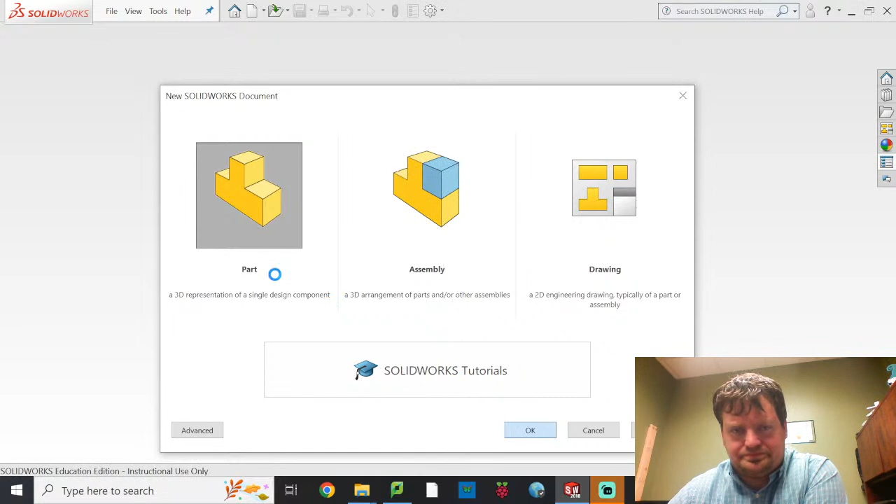I am putting together a video today to discuss how to animate a 4-bar linkage and how to plot a coupler curve. Now this is attempt number 2. I had a little bit of difficulty last time, so if you're watching this for the second time, go ahead and skip to the end when I actually do it right, because this will all be just stuff I've done before.

So we're going to start by making the 4-bar linkage. Here, there are 4 bars: a ground linkage, a rotating crank, a coupler, and a rocker. So that's the type of mechanism I'm going to be making.

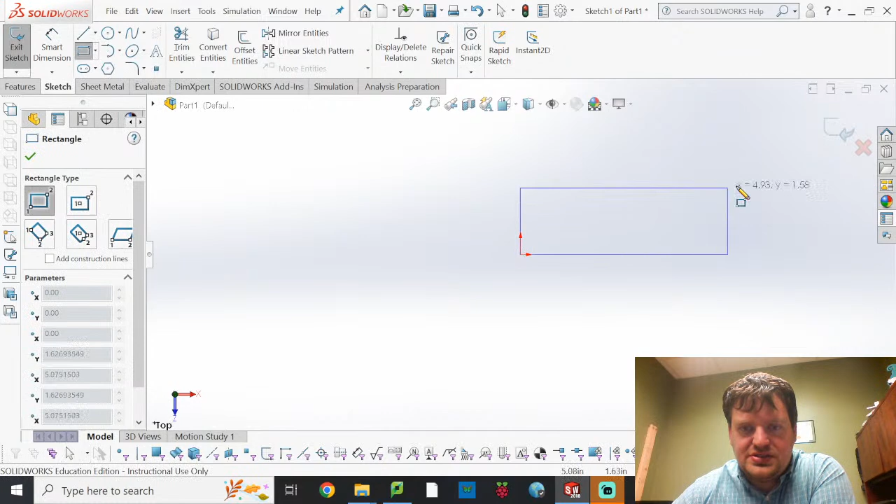Now, I've already done the math in my head, so I actually know what my link lengths need to be. I'm going to start by making my ground link. So here, I'll just make it nice and simple. Put a circle, circle. And then I'm going to create a center line here.

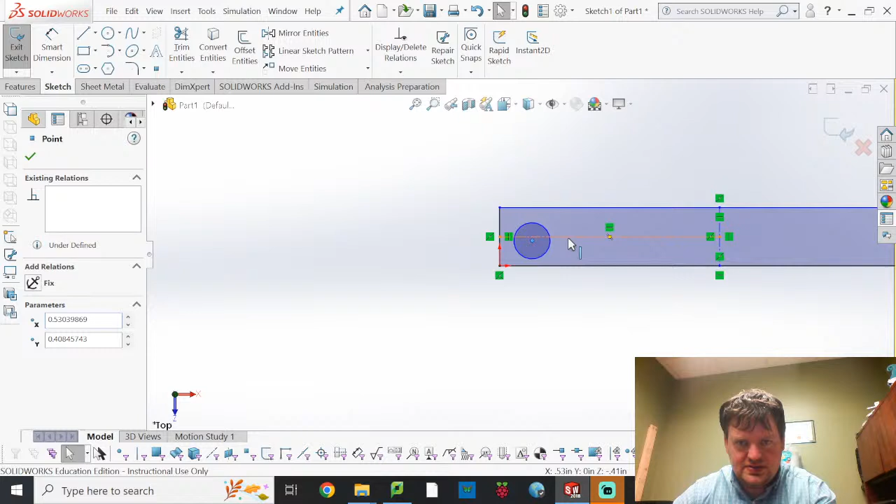And another center line here. I'm going to go ahead and select these two, control clicking on them, and I'm going to make them coincident, just so that it always falls in the midline there.

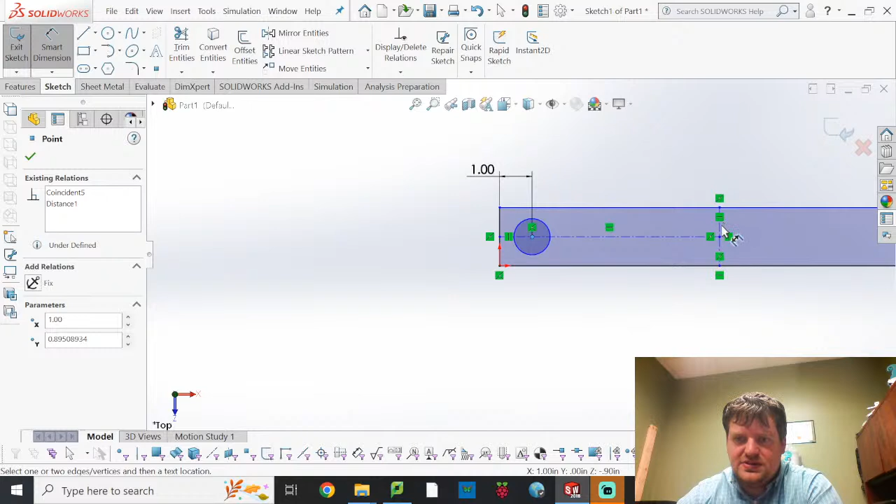And then what I'm going to do is I'm going to define 2 dimensions. Dimension from here to here, which I want that to be 1 inch, and then the distance from here to the center, which I want this to be 10 inches.

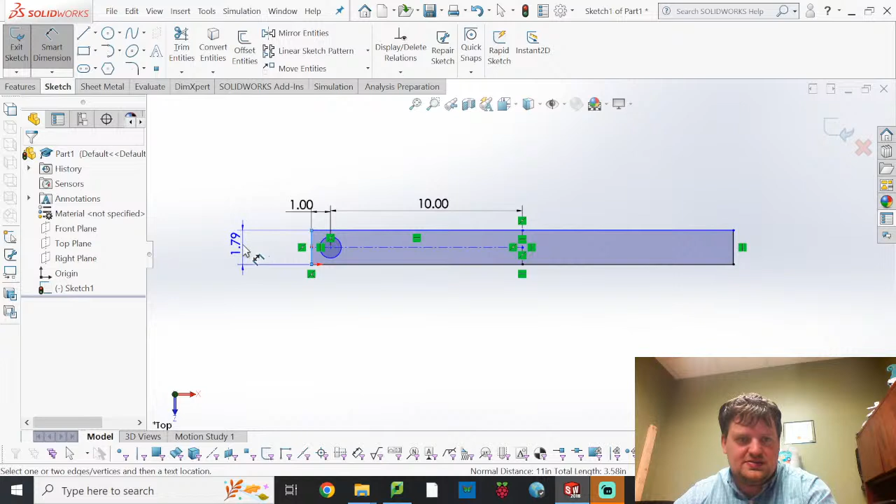We'll go ahead and say that I want—not that, I want this. We'll have this be about 2 inches wide. And I'm going to make my circle itself be half an inch, because why not?

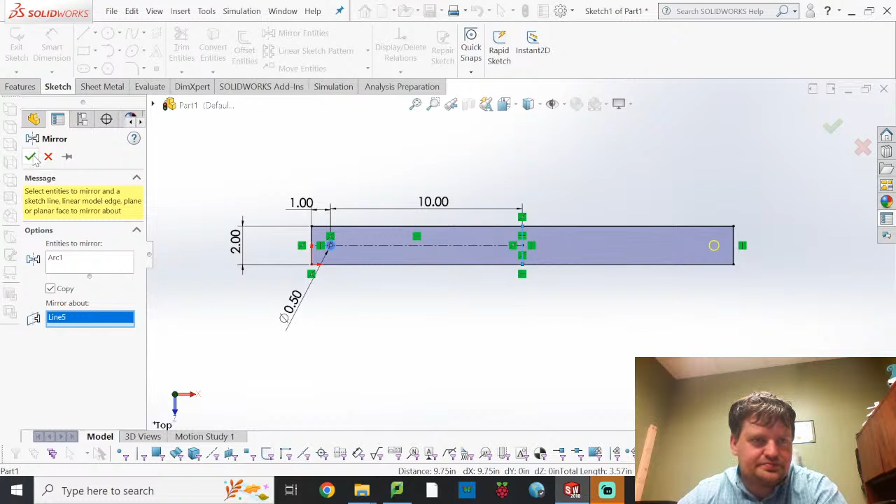Okay, one last piece. I'm going to mirror this over there so I have a nice uniform bar. So I'll take that mirrored about my center line here. And there we go, exit sketch. I'll extrude this up 1/4 of an inch, and this will be my ground linkage.

And done. 1/4 of an inch is a little thick, but you know, maybe we're making this out of plastic. So I will file, save as. And I've already got a folder set up. I'm just going to name this ground.

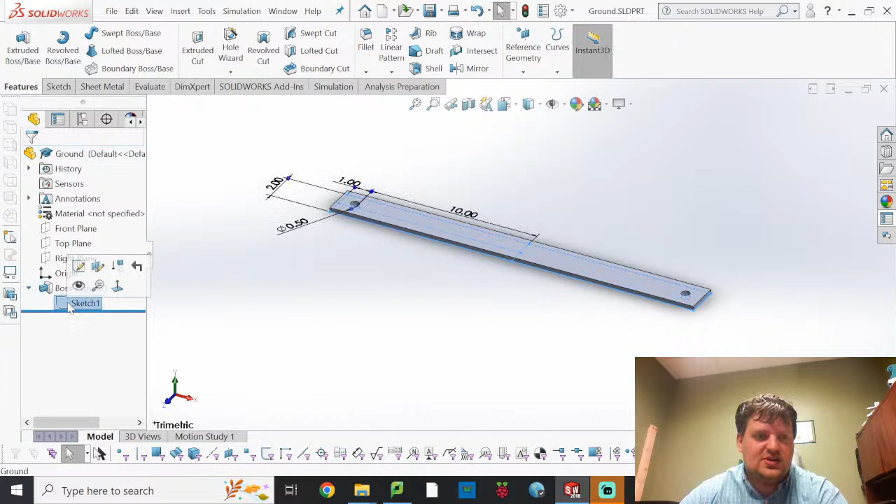Okay, now I'm going to do a couple of changes to my sketch, and that's all I'm going to do to make my different 4 bars. Here, I'm just changing this dimension. So here for a crank, I want a crank length to be about 6 inches. So I'm going to change this to be 3. Hit enter, exit sketch, it'll update.

I will file save as. If you just hit file save, it'll save over the ground one. Don't do that. Crank.

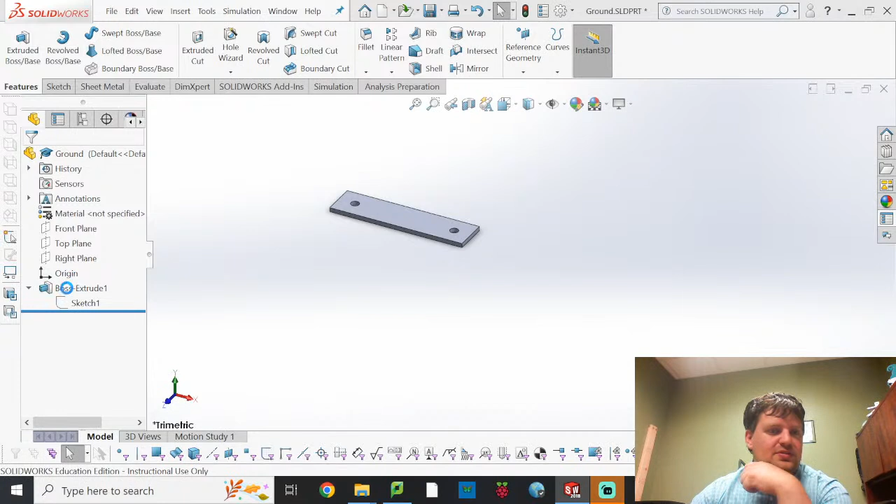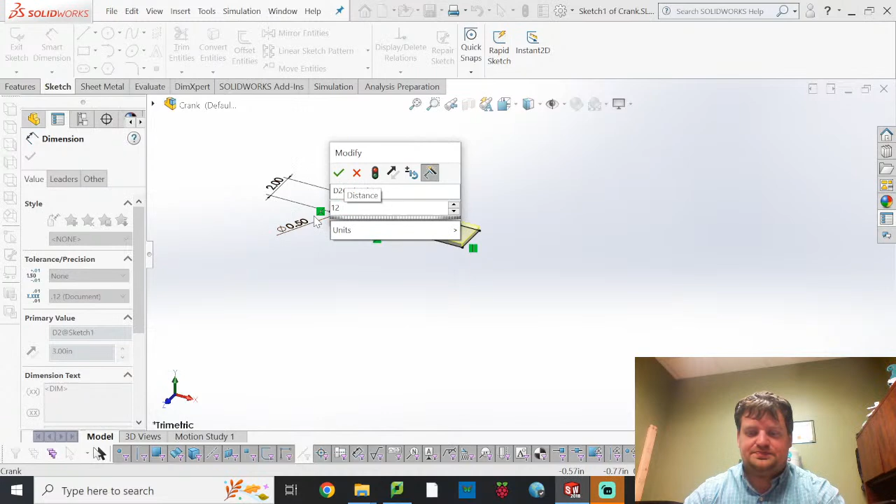Set my rocker. So here I've got 20 plus 3, and so that's—I need to have my P plus Q has to be larger than 20 plus 3. So I'm going to have that be, my rocker is going to be 12. Oh, I should have written 6. There it is. Exit sketch.

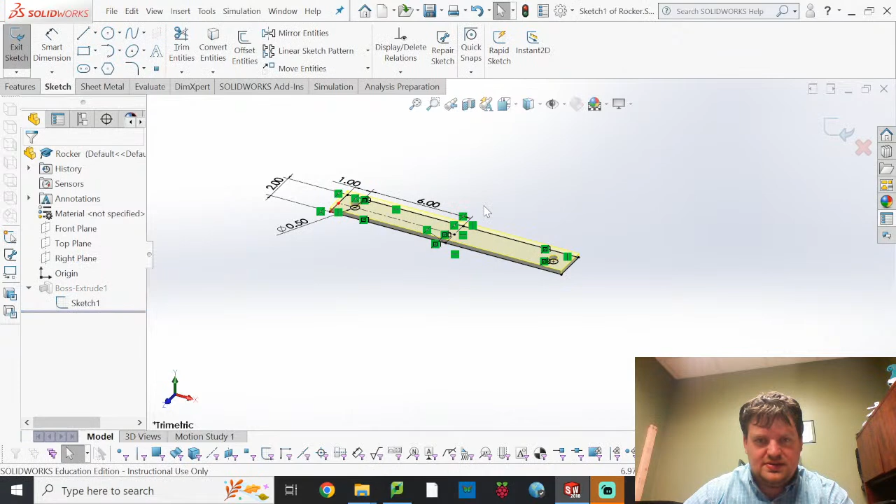File, save as. And this will be my rocker. And then one last change. This will be 16. And this will be my coupler.

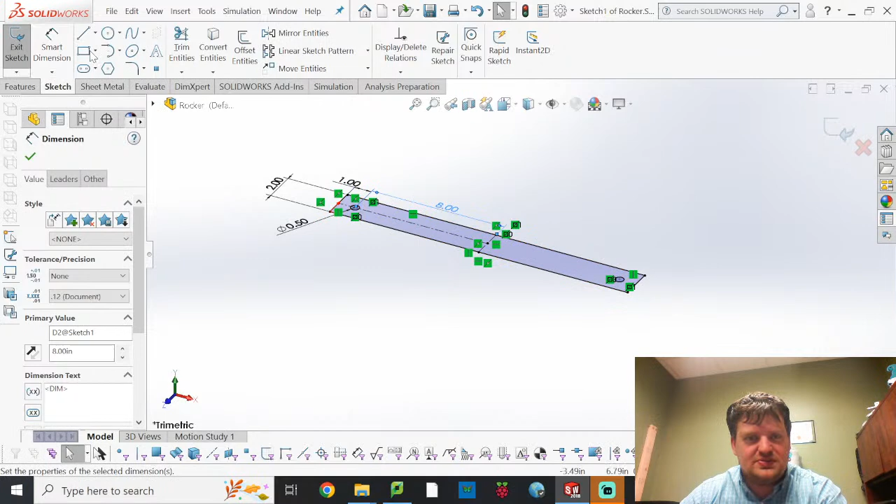Oh, should only be 8. Half the distance. Keep forgetting that. I could have dimensioned between these two circles. That would have been a lot easier in hindsight. And then we'll save this as coupler.

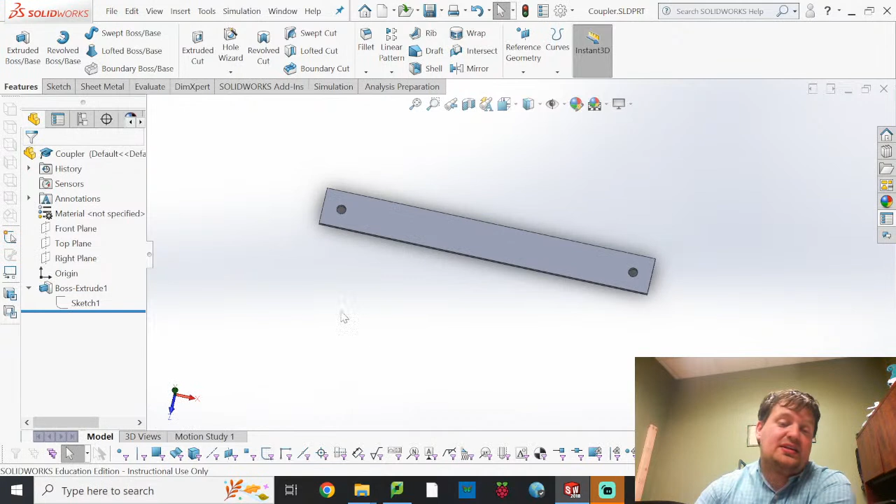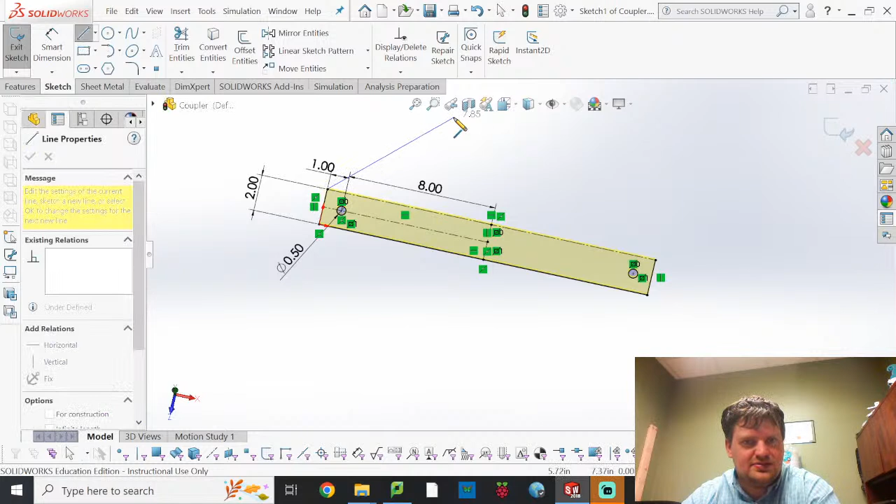Okay. Just because this is my coupler, and because I am anticipating there being a change, what I'm going to do here is I'm going to go back in and adjust this sketch a little bit. So here, I'm going to make this line be for construction. Just going to kind of break my drawing. And then I'm going to just go ahead and make my coupler be much larger than it was before.

Here I'm going to have this one be horizontal. Escape. And I'll select these two sides, make them be equal. And then I will smart dimension this distance here, and I will say that that is 10 inches. It could be anything.

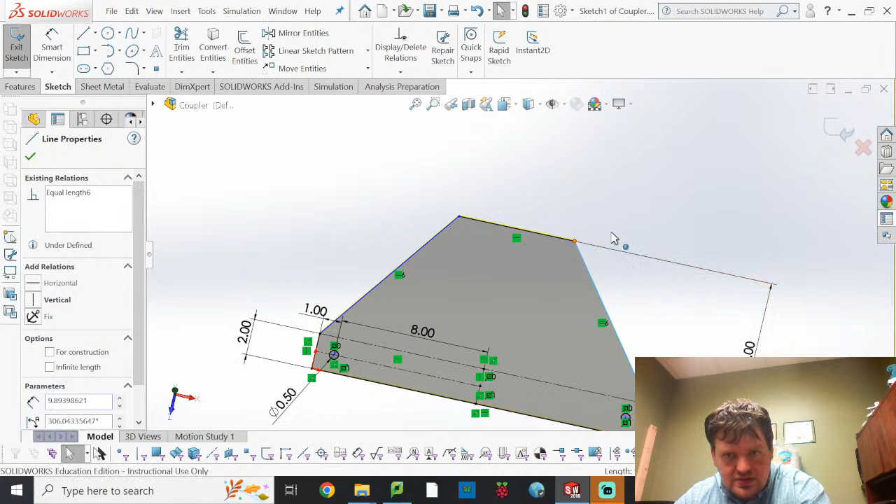Hit escape. Now it's saying that these two lines are not... oh yeah, because I didn't define a length for that top part. So we'll just say this is also 10 inches, and that'll fully define my sketch.

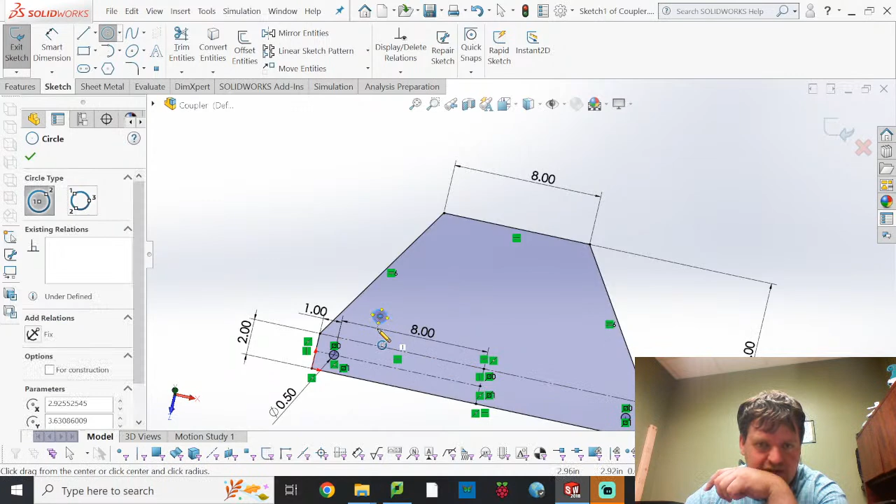But I'm going to add in a couple of basically holes. So I'm going to have it mirror about this point down here, and it'll rotate in about a 45-degree arc around there. So draw some circles.

I'm not going to do a great job of positioning this. In reality, I probably should.

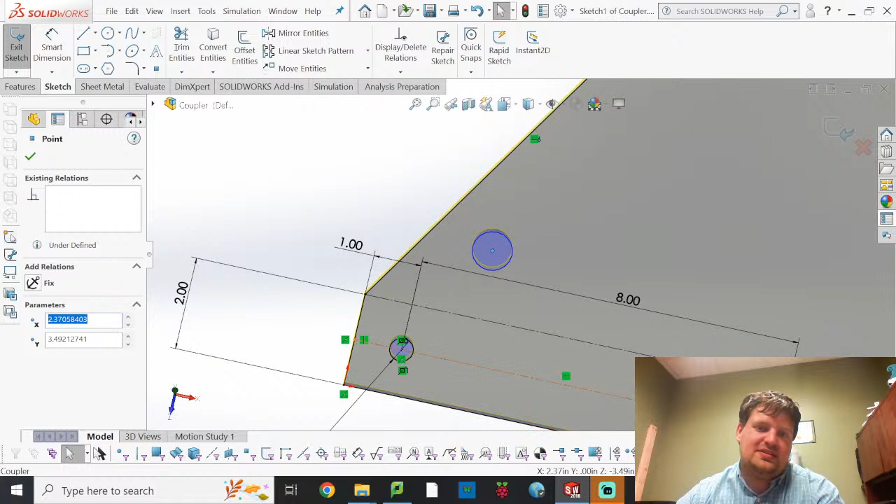You'll notice that it's already recognizing that I'm cutting this into it. I'm going to dimension this hole and then call it good where it's at.

Alright, now what I'm going to do is take that circle hole and do a circular sketch pattern. So here, this is what it's rotating about. I want it to be about that point.

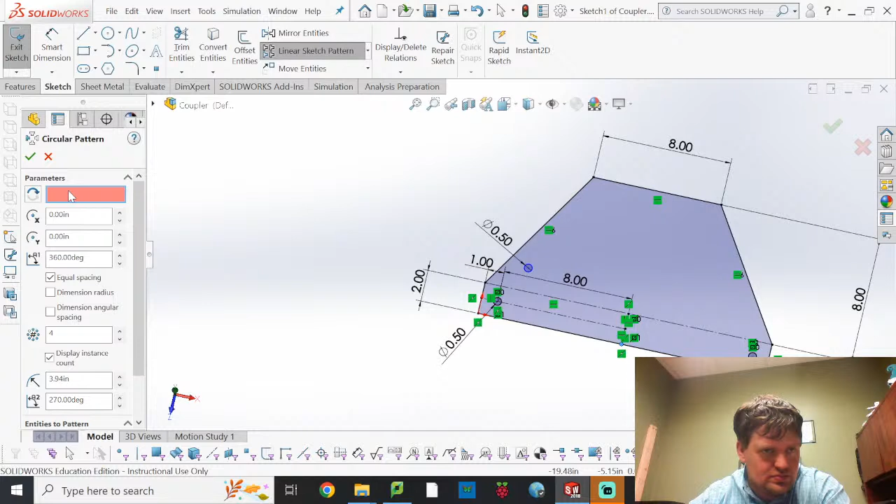Entities to pattern... that. Looks like it picked a point for me. I don't want that one. I want this one. There it is.

I'm gonna sneeze. Woo!

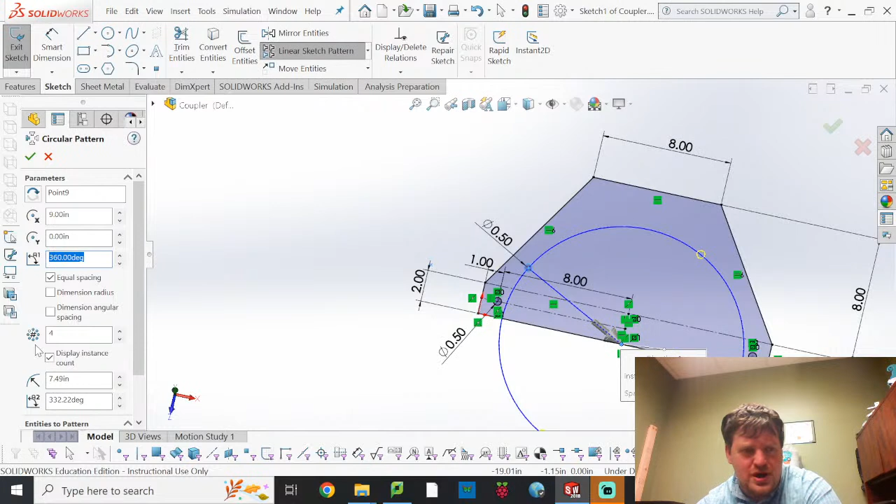I only want this to go about maybe 60 degrees. Nah, that's probably 120 degrees. There it is. And instead of 4 of them, I want 5, because we have to make 5 different coupler curves. So I'll hit OK.

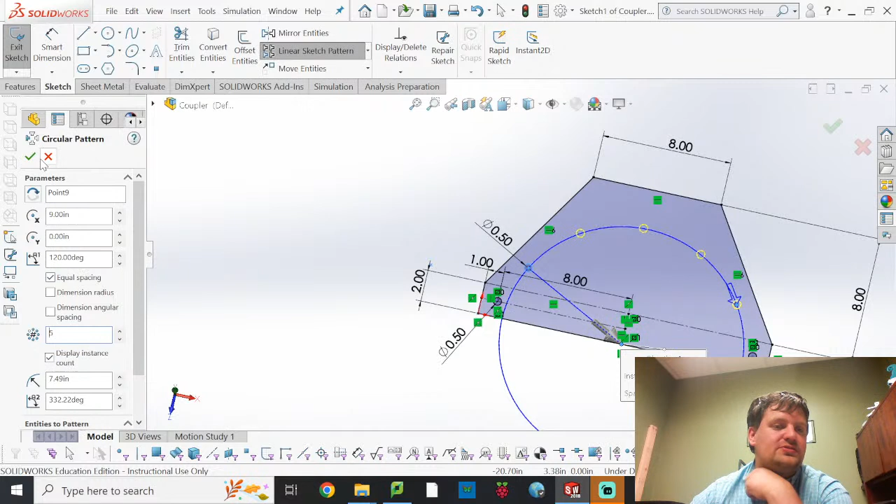There's my 5 new holes. I'll hit exit sketch, and you'll notice I've got a nice, neat little coupler with 5 holes that I can trace. So I'll go ahead and save this again.

And then we'll do a new assembly.

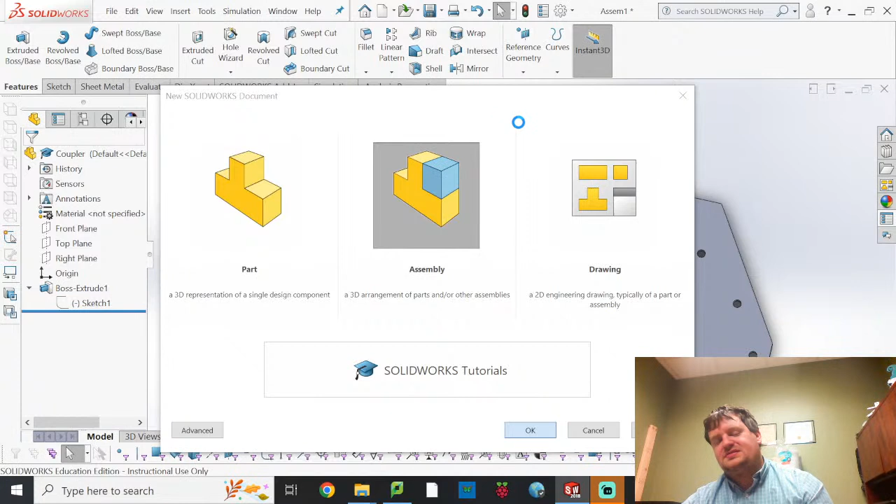Well, the first thing you're going to have to do in the assembly is put in all the mates so that your component is neatly positioned. But you've got to add all the parts before you can put in the mates.

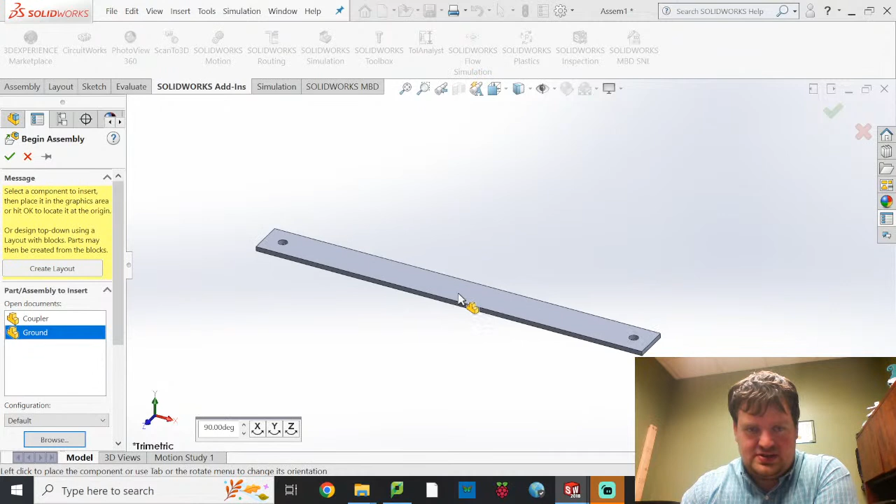Here I'm going to go ahead and grab the ground. The first part you put in is going to be fixed. You'll see over here there's an F - that means it doesn't move. It's considered to be the ground. Because it's called the ground component, I do want that to be the ground. I want it to be grounded and fixed.

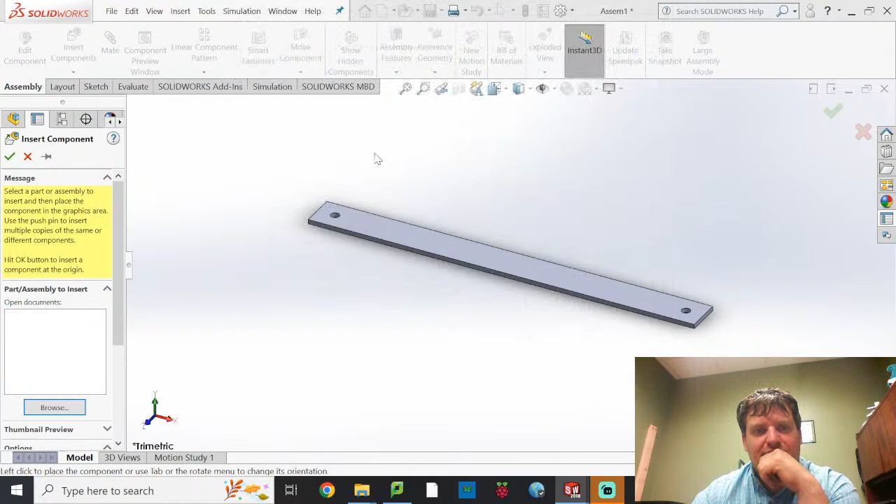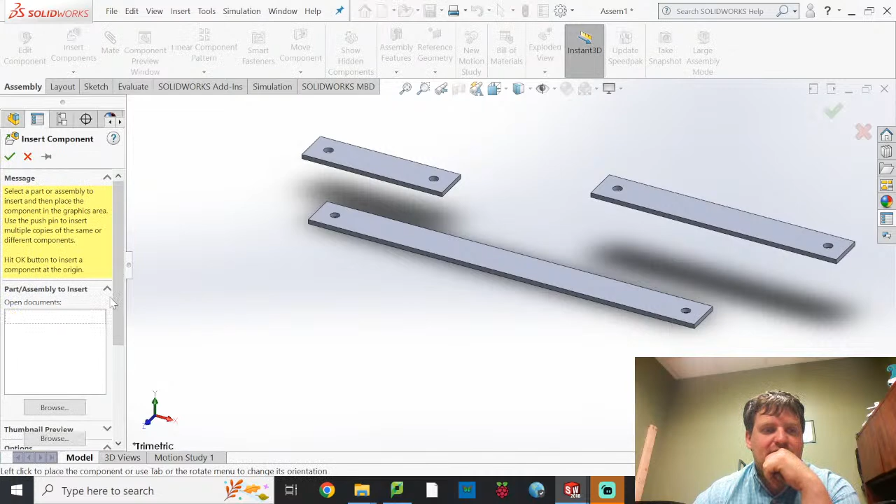We'll go ahead and add in our other 3 components. So start with the crank - I'm going to put my crank on this side. Then I'm going to pick the rocker - put the rocker on this side. And then lastly, input the coupler, which is already open because that was the last thing I was working on, and put it up top.

So okay, now I'm going to go into view, hide/show, temporary axes. This will show all the axes where I extruded the circle, so I can mate the axes together.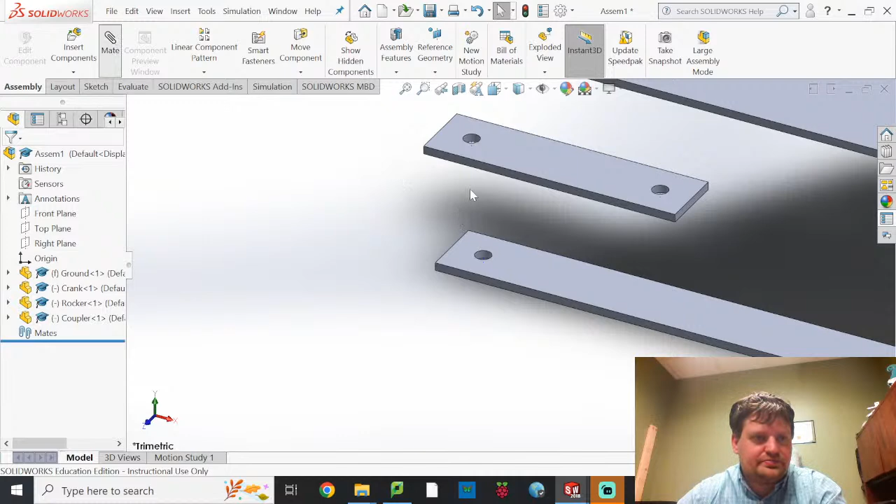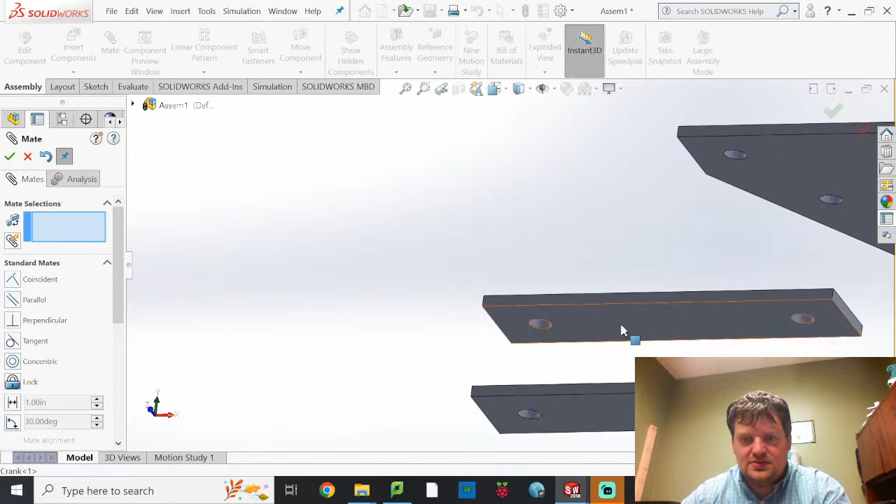Now it's time to put in some mates. So I click on mate, go to this axis, go to that axis - those 2 axes should be coincident, and I hit OK. Now I'll go ahead and mate face to face. So here I want that face... nice... to this face. And hit OK.

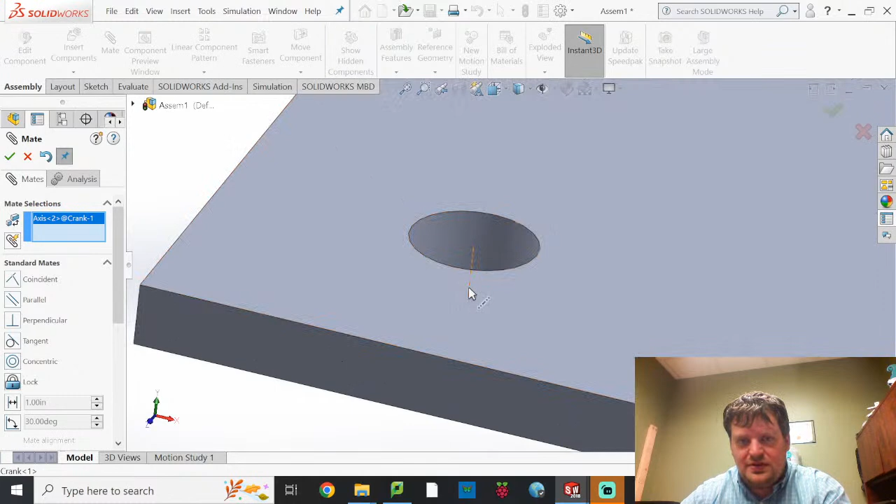We'll just keep going on the line. This axis, I want it to mate with this axis. Axis coincident, yes.

I'm going to go ahead and put the rocker on the ground before I finish the coupler. It starts getting a little ugly when all the components are stacked on top of each other, in my opinion.

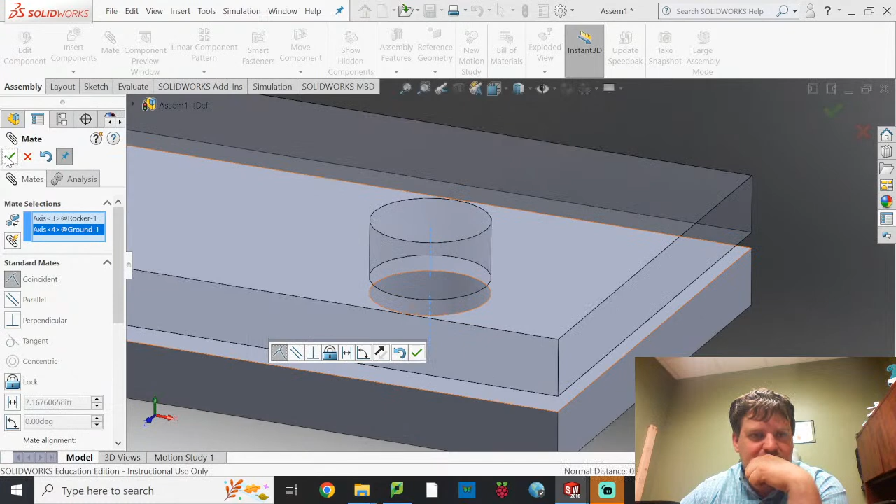Okay, not a ton of space to reach in there and grab a face, but looks like I have enough. Face to face, okay. So now I have face to face.

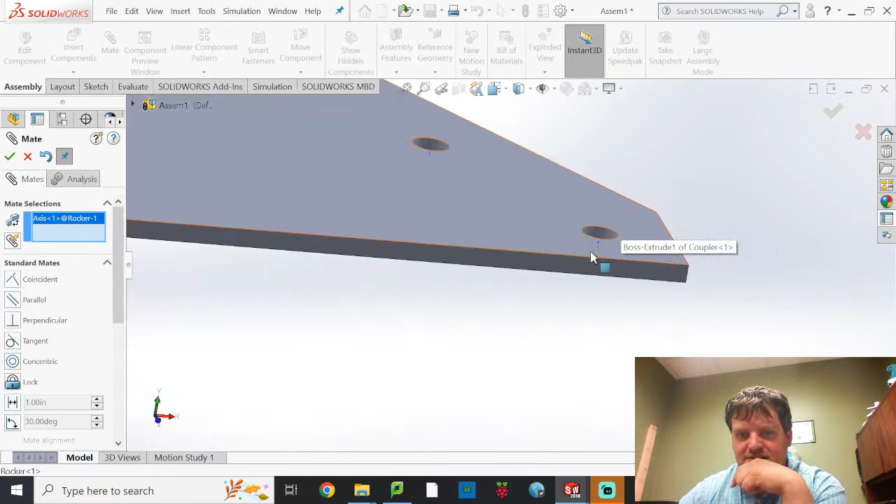We'll do axis to axis, and then I will mate one of the faces of the coupler to either the crank or the rocker. Here I'll probably mate it to the crank - the bottom face of the coupler to the top face of the crank - and that brings it into place, and now I am done with my mates.

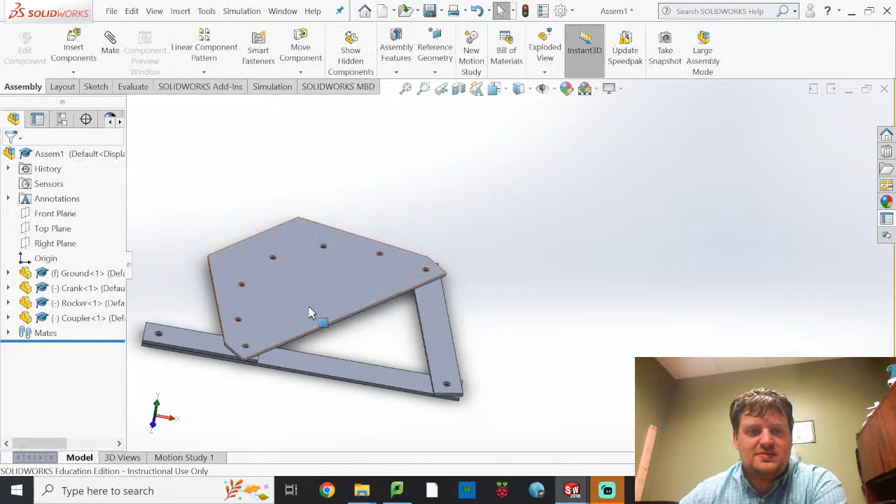And you'll notice that I can zoom out nicely. I can spin this in 360 degrees.

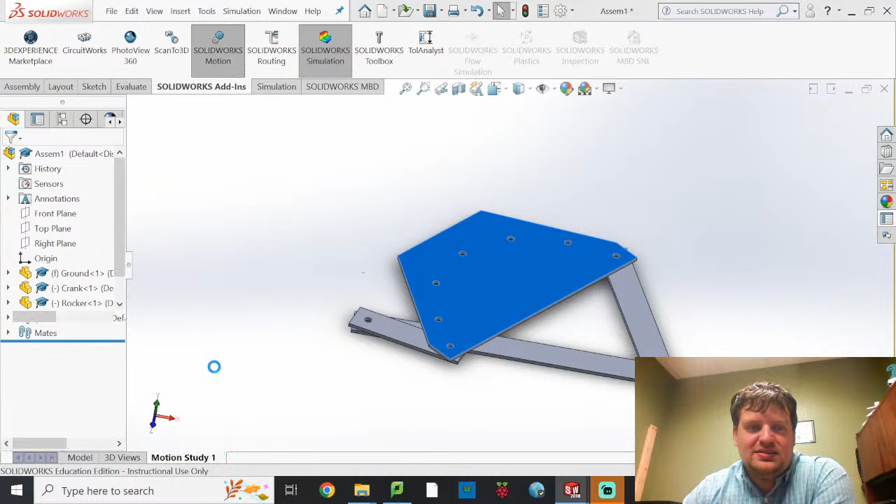Alright, so my next step is I have to go to my SolidWorks add-ins and turn on SolidWorks Motion. This is going to allow me to do a motion study. If I go down here to motion study, I'll be able to put in a brand new one.

We're going to start by clicking motion analysis. Up here, we don't want to be working in animation, we want to be in motion analysis. Then I'm going to add a motor. This is going to be a rotary motor.

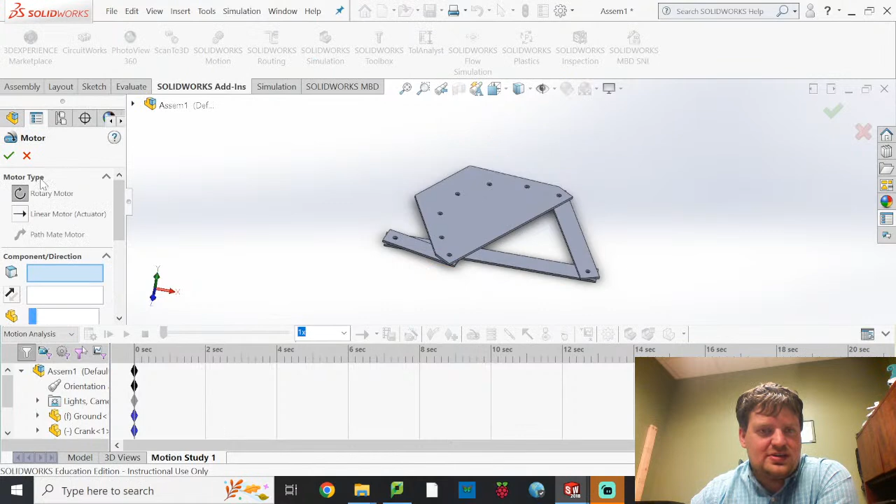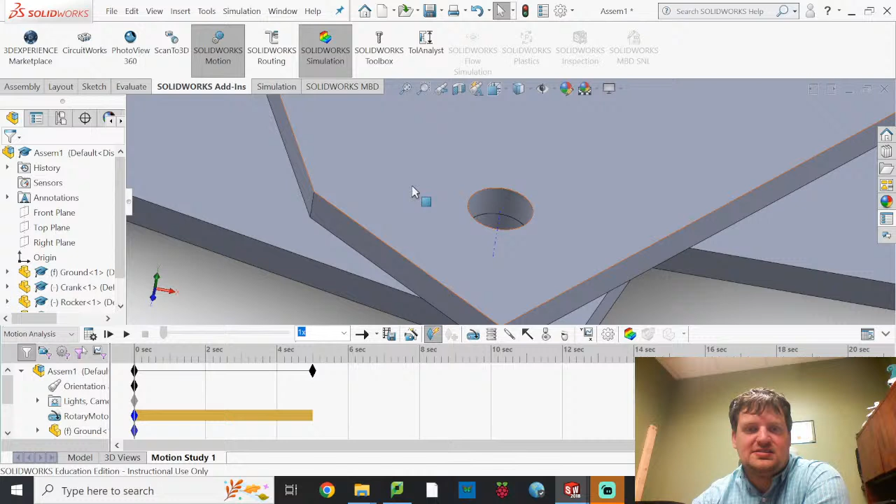Now, in my last video, I over-constrained this by picking something for all 3 of these. In reality, all you have to do is just click this axis. That was the mistake I made in the last video. Hit OK, hit yes, and it's going to assume that axis is now positioned relative to ground.

So now when I hit calculate, oh, it's going to give me an error. I'm going to try just hitting calculate again. Oh, you do not like this, do you? It hits a point of inflection, and apparently it doesn't like that.

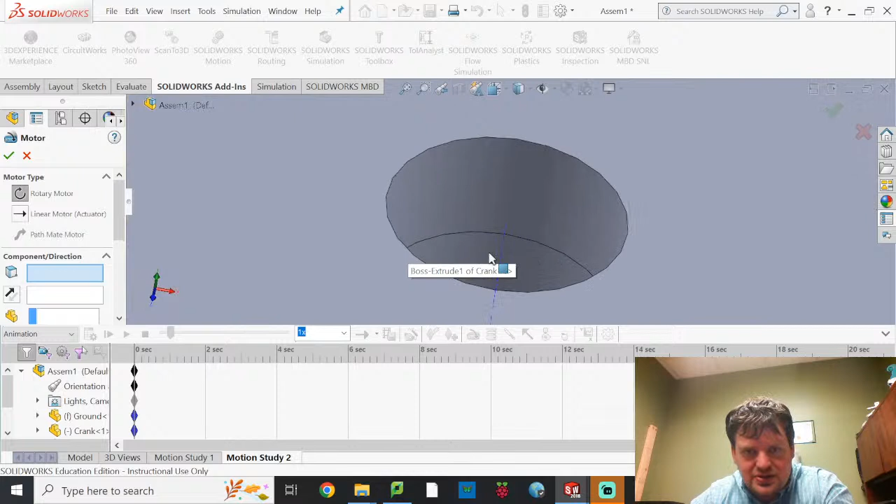So I'm going to try starting by making a new motion study, see if I can move this to a different piece. Here, we'll once again do our rotary motor. Go down, select this axis, set it to 20 RPM, and hit OK.

We'll do our calculate. Went backwards, that's fine. If you want it to go longer, you can grab on this black piece and have it go a little longer, then recalculate it.

Nice. All right, so now that we have our motor picked and everything, I'm going to go to my results tab. Oh, I'm in animation. My bad. We'll try that again.

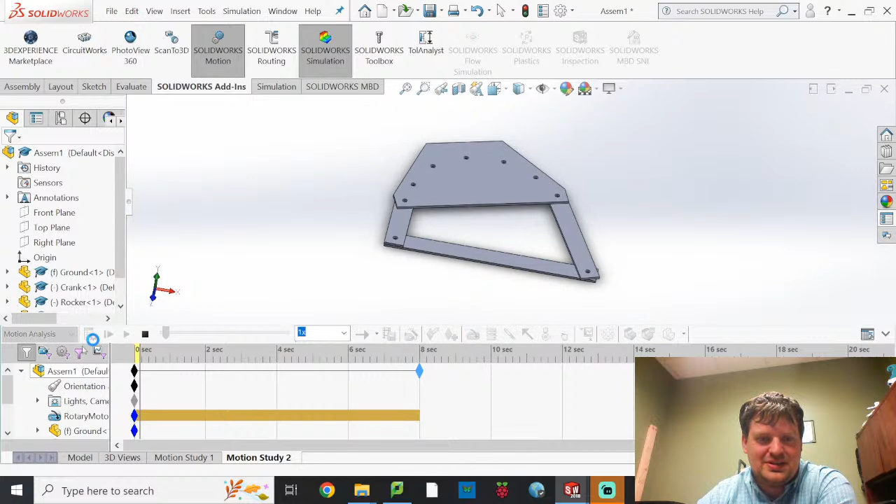Here you'll notice that the resolution of this is much, much finer than it is for animation. That's on purpose. Motion analysis is supposed to be much more in-depth than an animation is.

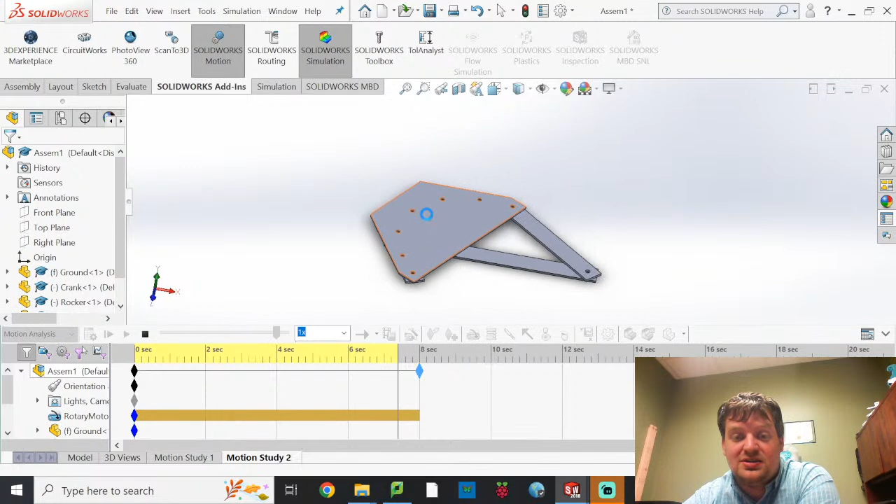Okay, kind of regretting making it go 8 seconds because it's taken forever. But you know what? Things were learned.

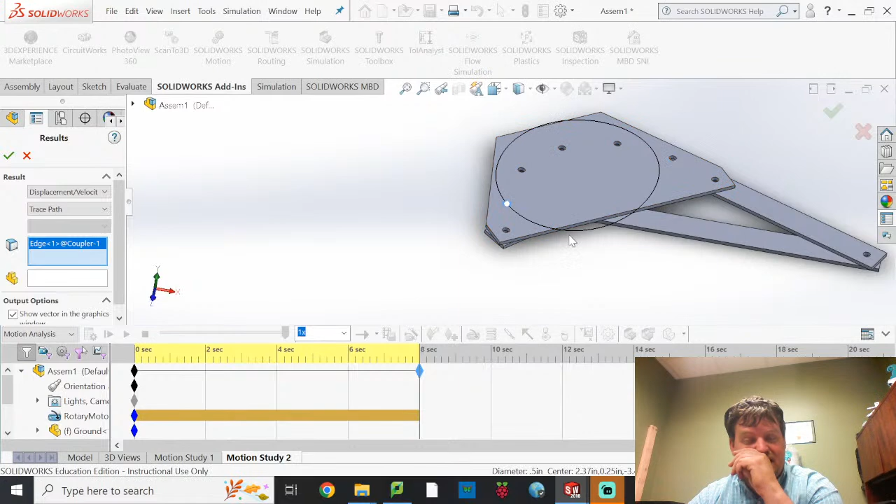I'm going to go to my results tab. Select a category, displacement, trace path, the path I want to trace. I'm just going to go ahead and select the circle. It'll select the center of the circle and it will just plot it right there for you.

Now I'm going to zoom to my y-axis, get to a place where I can see it, and then control pan. This is the image I'm looking for. It shows the path. You can zoom in if you want, collapse the motion manager, make this a little bigger, zoom in. I'm just looking to see 5 coupler curves like this. So here's one of them.

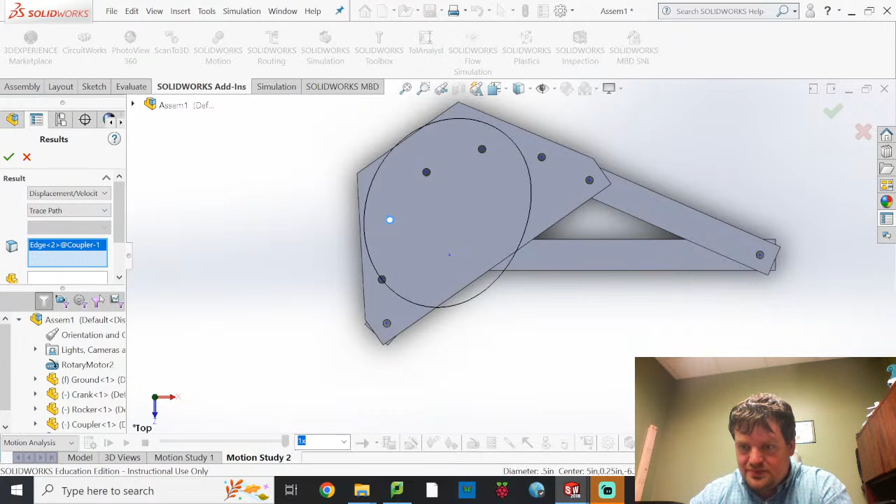Now I can take this, take a screenshot of it, delete this, select a different circle, and trace that path then too.

Okay, so here I've got this one, I've switched it, I'll hit OK. It'll change my path, so I can drop this down again, and then I would take a screenshot here. You'll notice that this is very distinctly different from the first coupler curve.

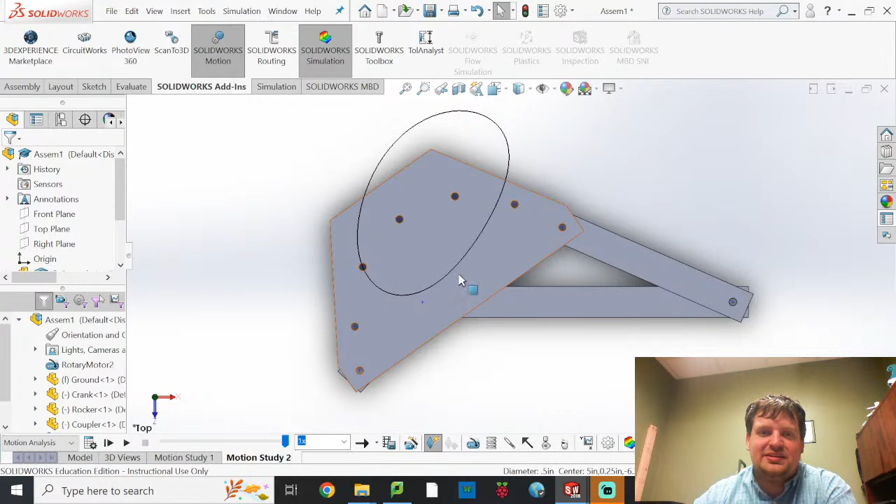Now I will switch, go back to my results, pop this out, right click, edit feature, and then all I'll do is select a different curve. Hit OK.

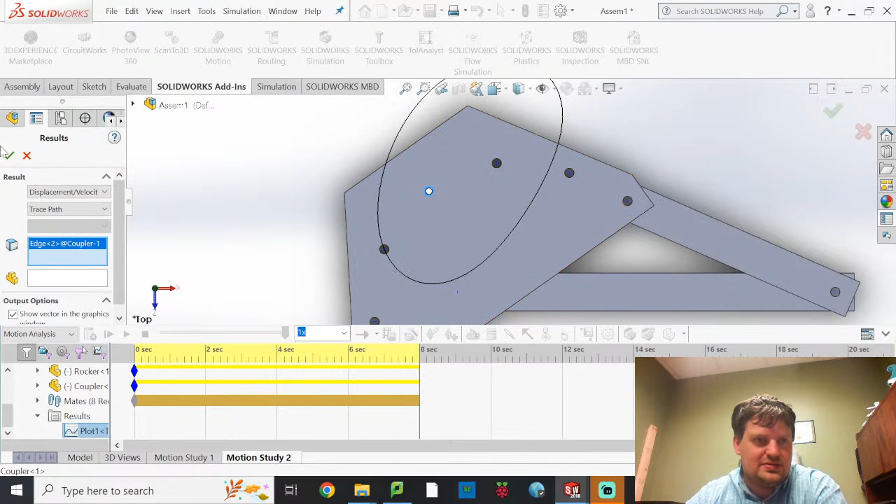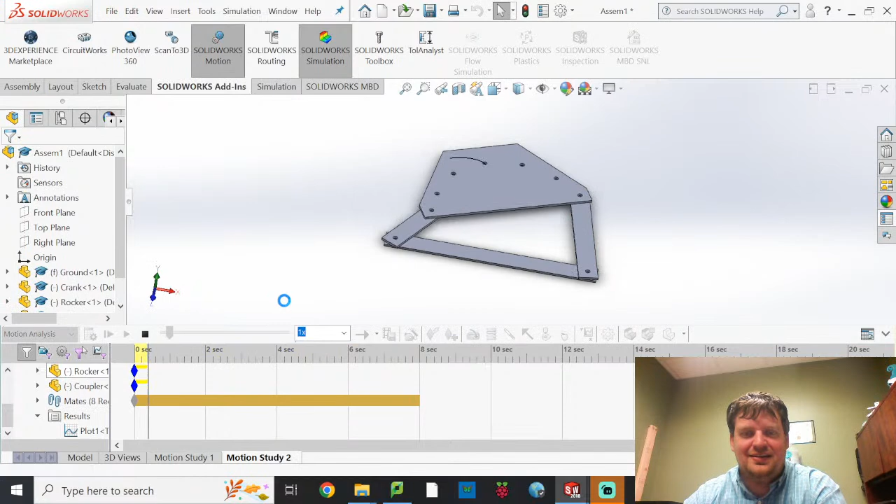Okay, that didn't update. So, oh, there it is. There it updated. Oh, and then it immediately goes back. Nice work. So I'll hit recalculate. SolidWorks, fickle mistress.

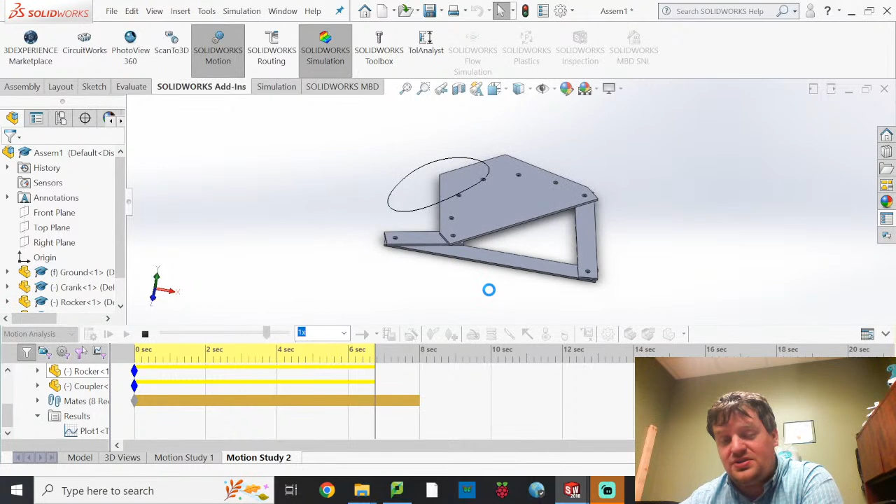So once again, I'm just going to go, when this is done, which I should not have made this 8 seconds, it can complete in 4. But I'll just zoom in from the top again and take another screenshot. Now you have to do that 5 times. You have 5 different circles that you've created. That's basically what I'm looking for this assignment.

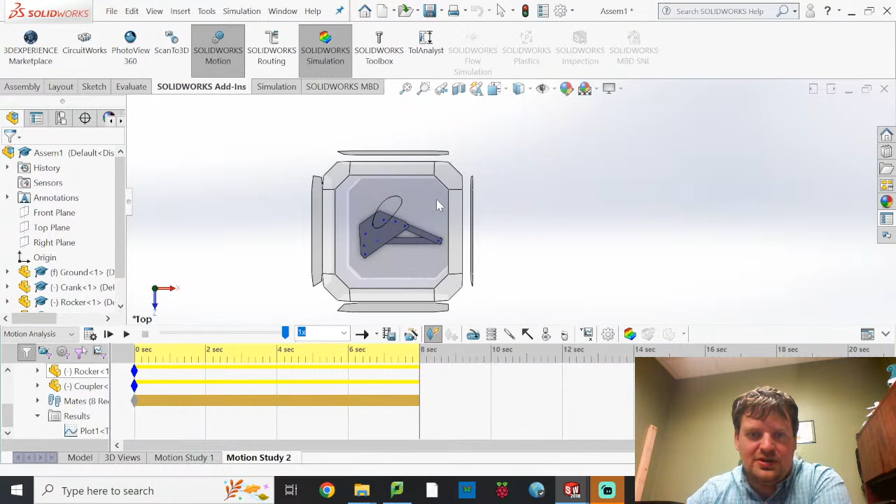All right, now make sure to, in your document, state what your link lengths are and show me, try to get a pretty consistent view. Might help if you just click top view because it'll zoom in like this. Try to get a pretty consistent view between your 5 screenshots because that'll allow you to compare what the different coupler curves look like compared to each other.